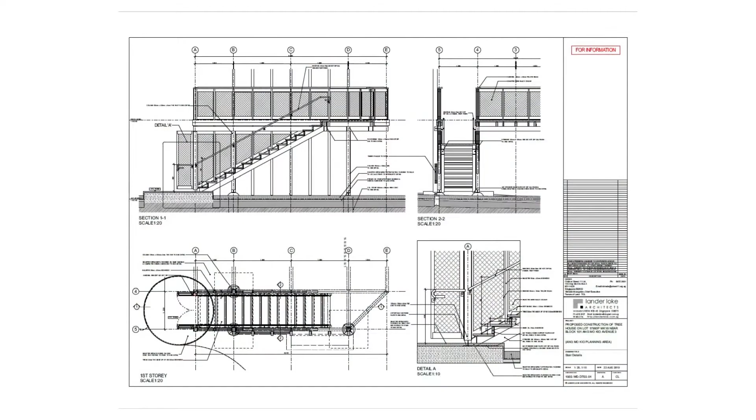Well, I think throughout our practice we have always done our own drawings, even before we started using BIM. And we always believe that the architect must do our own drawings because the ideas come from us, and this is where we have to convey our ideas to other people. So we always did our own drawings.

But why we use BIM is because in the past, using other tools, we had to involve a lot more other people because sometimes the work was so much that we cannot do it all on our own. But using BIM allows us to actually go back to the traditional role of the architect, being able to control everything, being able to generate all the outputs from just this one software. So to us, it's an irony that using something modern, we can actually recapture the traditional role of the architect, which is like thousands of years old.

We design using BIM, so we model, and the software is actually generating the documentation for us. In the past, things happened in stages. We had the design stage, then we had documentation stage, submissions, then after that we go to construction. But now everything is happening simultaneously. Instead of going step by step, while we're designing, the documentation is also happening. So it's not the factory line production process anymore. Now it's more integrated. What do you think?

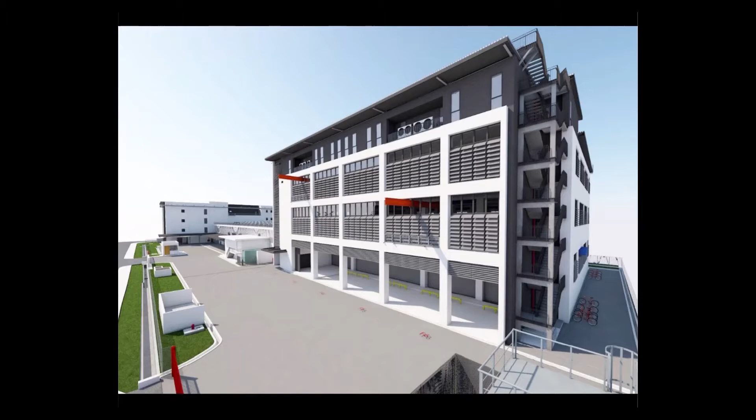We'll tell you something about the Woh Hup Technical Hub, which we just completed. It's a project of about 13,500 square meters. Normally for a project of this size, we would need a team of maybe an architect, an assistant, and maybe 3 draftsmen in the past, or something like that. But in our office, it's just the 2 of us. We don't have any draftsmen, and we basically just handle it ourselves.

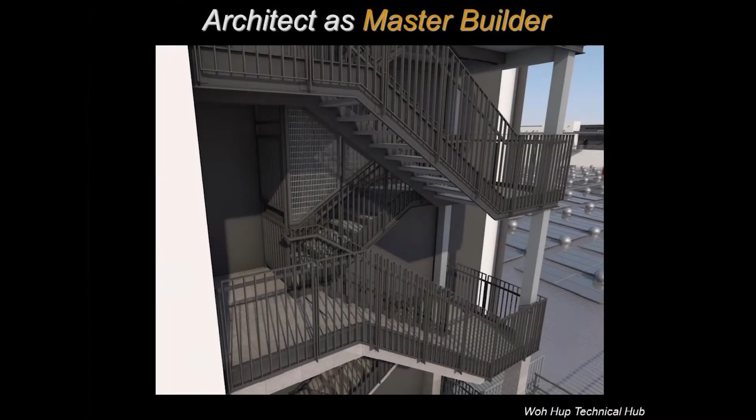Generally two of us, or 1.5 of us, because it wasn't both of us full time. And we model everything. What we tend to do now using BIM is to model everything right down to the last detail, and we start from the beginning: the footings, the piles, the pile cap, the ground beam.

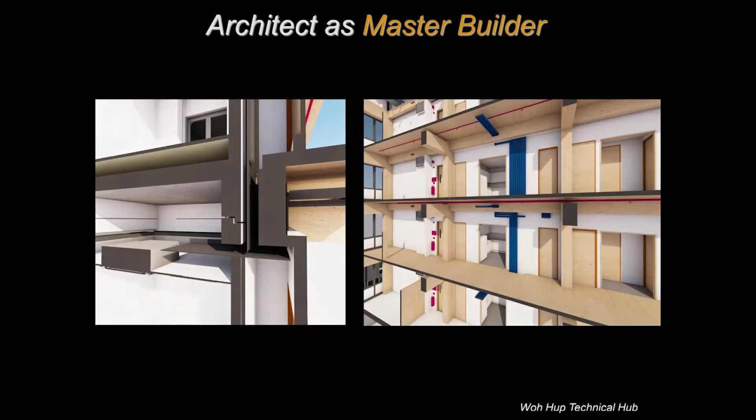Yeah, everything. And for this project, it's quite interesting because there's a combination of precast structure as well as mass engineered timber. So there are certain tricky junctions between the two different materials, and also how the services are then run. So we model all of that to the degree that we could then generate the 2D plans, elevations, sections, details, without doing any 2D drafting at all. So all the details and documentation were generated from the model itself. And in that way, we can make sure that the information given is correct, that it will be built correctly.

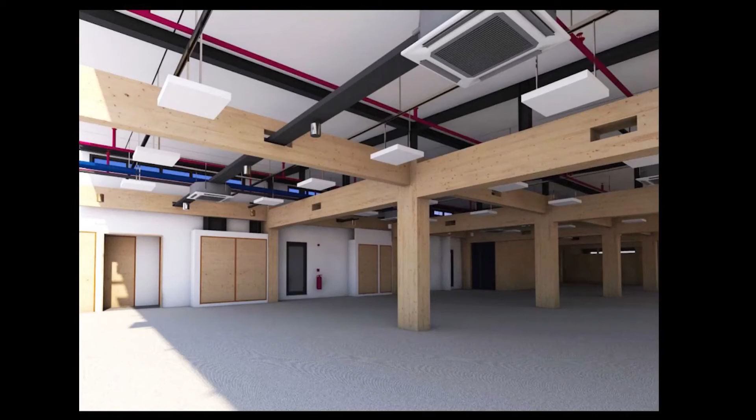Master Builder, I think Virtual Builder, because all we built was a virtual model, but we build it in a way that the building itself will be built. And particularly with MET, the beams, for example, are not continuous beams. They're all simply supported beams, a post and beam type of structure and bracing. So these were all modelled the way they will be built and assembled.

And our information was then sent to the MET specialist in Austria. So the cutting schedules were important as well, because we needed to coordinate the penetrations. So we modeled all the openings and every element, and then that was given to the supplier so that they could fabricate it in Austria and then ship it to Singapore.

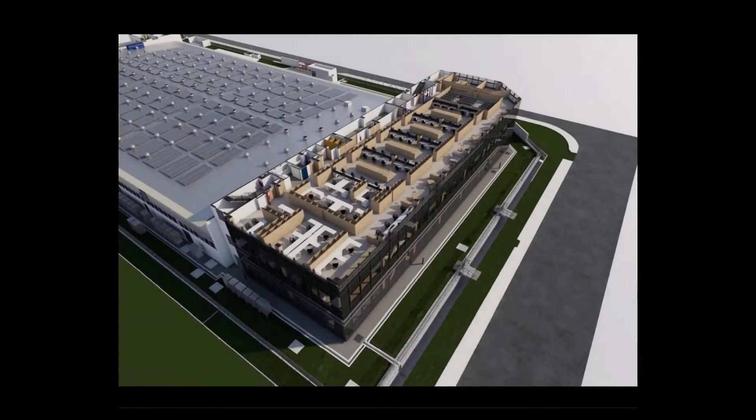And even simple things, even freestanding objects like fire extinguishers, we would put into our model to make sure everything is aligned. So as the architect, it has given us back that control, that everything in the building has to be in the correct place and correct alignment, and we are able to express this by modeling it and then conveying it to the builder. For Woh Hup Technical Hub, we also use BIM to coordinate with other consultants.

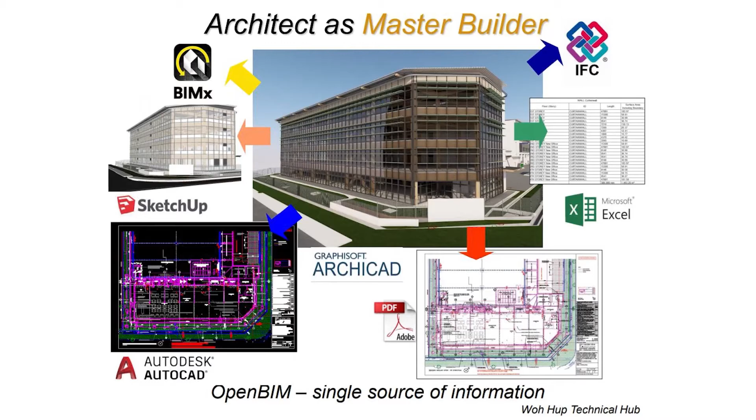So the reality is the state of the industry is that not everyone is using BIM, and even if they are using BIM, they are not necessarily using the same tool. But what we find really useful in Archicad is that it is able to export in so many different formats. Most people are most comfortable with PDF, so most of our drawings are issued in PDF. But the industry is still very comfortable with using DWG, 2D drafting. So a lot of the subcontractors and consultants prefer us to give them DWG files, which we do. And that saves them a lot of time in having to redraw, and it also saves us a lot of time in having to check whether their base drawing is correct.

And then we also have some consultants who like to use SketchUp, so we can also export in SketchUp to them. And for those who are comfortable using BIM and want the geometry, we can export in IFC. We also export schedules, quantities, various measurements in Excel. And for the layman or even for the builder, we sometimes give them the BIMx file, which they can carry around in their mobile phones or iPads or tablets as a quick reference. For the layman, it's very user-friendly. They can just download BIMx for free, and it helps them to understand the design.

So we find that this kind of flexibility is very important because it allows us to adapt to different consultants. We don't expect all consultants who work with us to use the same tool. That's not the reality. So what we do is keep ourselves quite flexible and remember that the most important thing is that we want to communicate our design. So whichever way is best to communicate our design, we will use it in whatever form the other party is comfortable with. We are equally adaptable and we can just export the information in that format. So that is actually the most important thing. It's not using BIM for BIM's sake. It's using BIM as a way to enable us to communicate with our people.

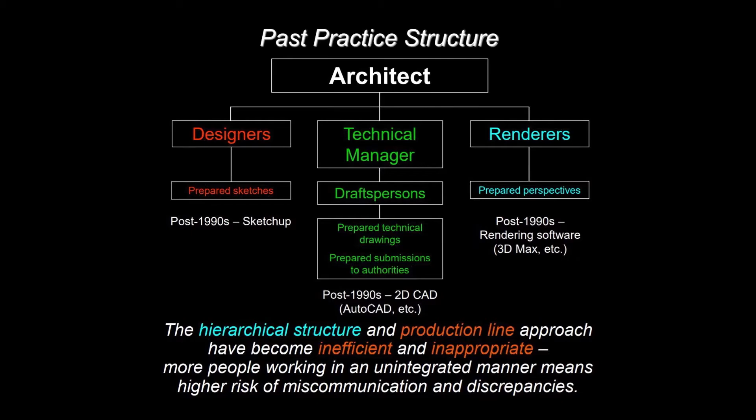To get the most out of Archicad, I think there needs to be a change in practice structure. So in the olden days, practices were organized into different departments. You might have a design department, a documentation department, a compliance department, because the documentation part was really, really very laborious. And most firms would need a big team of draftsmen to do all the drafting.

But now, using Archicad, because the source is just that one file, from the one file we are able to generate perspectives, we're able to do the documentation, we're able to do our submission drawings. So in a way, it's made the workflow more integrated.

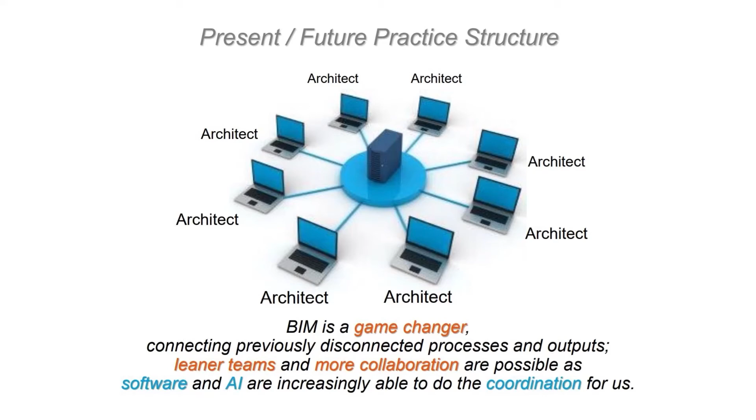Teamwork. Yeah, and so we use Teamwork for the Woh Hup Technical Hub project. Both of us can actually work simultaneously on the file using Teamwork. And the Teamwork platform actually means that if more than one person can work on the file simultaneously, you don't even need to be in the same room. So you can actually be collaborating with someone in another office and even someone in another country.

So it has actually opened up a lot of opportunities for us to be able to collaborate, especially as a small practice where we don't necessarily want to have a lot of people in the practice, but we can then pick and choose who we want to work with, and even look at who we can work with internationally as well.

We use Archicad because it's actually quite intuitive. I mean, BIM software typically has to be complex because it needs to behave intelligently. So there are quite a number of settings and things that you will inevitably have to do if you want the model to be intelligent.

But Archicad is designed by architects for architects. So in a way, it is in line with the way architects think. So it makes it a tool that actually makes us better architects. The degree of detail that we provide now is much, much more than we ever did. Because in the past, if we had to do 2D drawings and we had limited time or limited resources, then we could only do so many drawings.

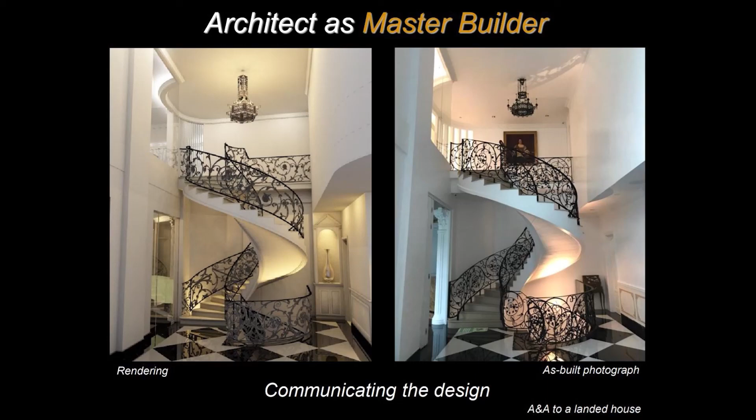So the rendering tool is actually quite a big bonus, and the quality of rendering is so realistic now that you can hardly tell the difference between the real thing and the rendering.

Well, I think the most important thing is to know why you're using BIM. Yeah, don't just use it because somebody told you to use it or you heard that it's good, but use it because there is something that you want to achieve, and then use it in a manner that suits you best. The tool is only a tool, and it's more important that you know why you want to use it and how you're going to use it. That's more important than just using it for the sake of saying that you use BIM.